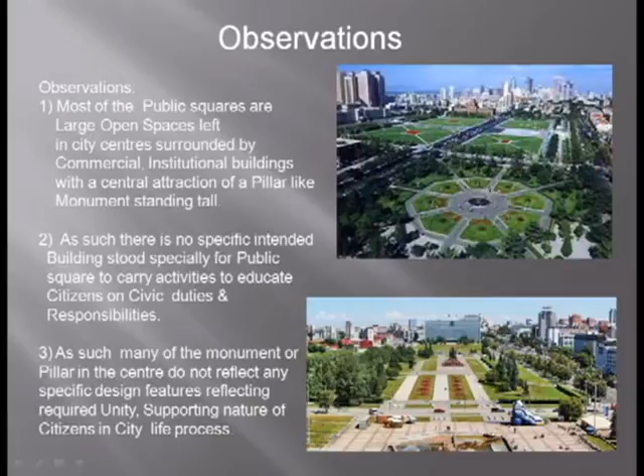Many times, these city centers become targets of people's protests on public issues which have gone out of control, and the protest march turns violent, creating chaos at these centers. The reason is that public square activities have never been targeted to educate citizens on duties and responsibilities through a dedicated space historically. Citizens fight for their rights, but do they know their duties and responsibilities, which is the basis of the life process of a civic society?

If the public closes their eyes while public issues grow, and when it comes to monster size, the public tends to flock to city centers and public squares for protesting, which may turn into violence in many cases, creating chaos at the public square. If citizens are irresponsible with their behavior in their own lifestyles as well as towards society, it can create lots of public safety problems.

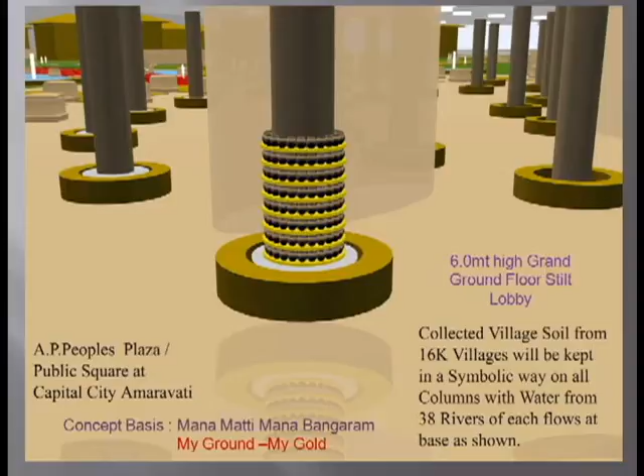Concept basis: Mana Matti, Mana Bangaram - My ground, my gold. Soil collected from the 16,000 villages will be kept in a symbolic way in the grand ground floor stilt lobby, 6 meters high, around each column, and at the base of the column water will be flowing, as shown.

Zoning plan for the 42-acre site. The site is divided into 17 zones to meet all the requirements to have a public plaza, public square, meeting all the requirements of all sections of the people.

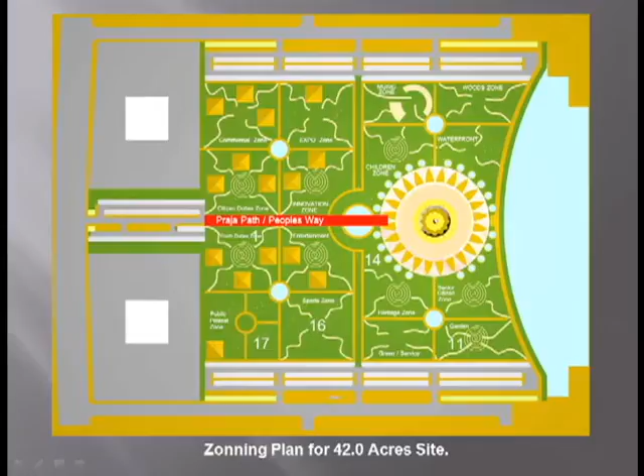Proposed zoning area statement: As said, the site is divided into 17 zones, like this: Youth Zone, Citizens Duties Zone, Science and Innovation Zone, Commercial Zone, Exhibition Zone, Children's Zone, Entertainment Zone, Waterfront Entertainment Zone, Waterfront and Sports Boating, Senior Citizens, Park Garden, Green and Services Zone, Heritage Zone, Monument Zone, Enlightenment Zone, Sports Competition Zone, Citizens Demonstration Public Protest Zone, including police post.

Proposed land use area statement: Proposed building footprint is around 3%. Open space for all outdoor activities including green areas is 60%. Monument zone is 3%. Internal driveways and parking take 21%. 3-meter wide pathways and footpaths account for 13%.

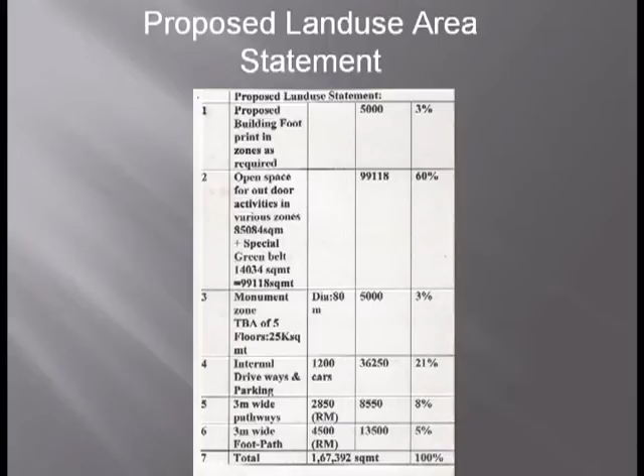Proposed concept design features description. Point 1: Access inside the site is provided from 3 roads with 3 styles of arcade columns, indicating different types of people coming and joining at Praja Path, the Ceremonial Boulevard, which leads people with a red carpet welcome to form a spiral force around the monument, and will further form support columns to the monument at ground level like stilt columns.

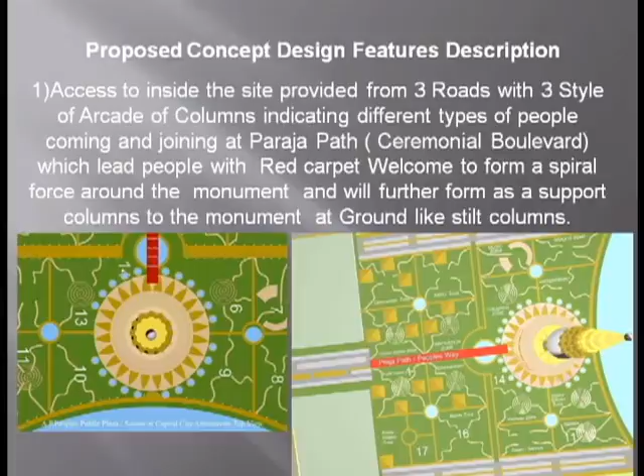Point 2: 1,200 car parking bays are proposed from 3 roads, and the rest of the site is pedestrian friendly, with only service vehicles allowed.

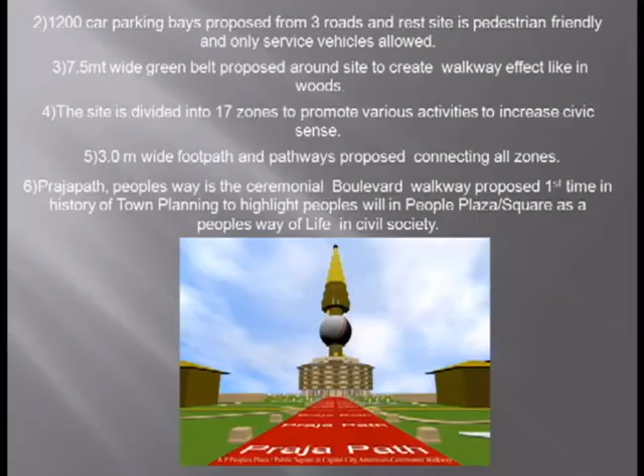Point 3: A 7.5 meter wide green belt is proposed around the site to create a walkway effect like in woods. Point 4: The site is divided into 17 zones to promote various activities to increase civic sense. Point 5: 3-meter wide footpaths and pathways are proposed connecting all zones. Point 6: Praja Path, People's Way, is the Ceremonial Boulevard walkway proposed for the first time in the history of town planning and architecture, to highlight people's will in the People's Plaza Square as a people's way of life in civil society.

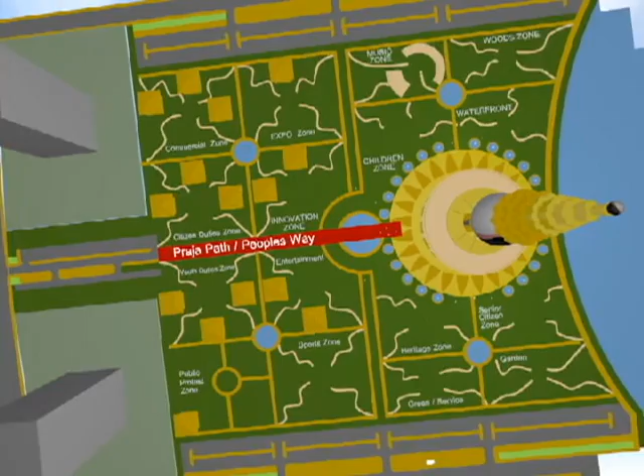The monument tower reflects unity and support of the people, like a human pyramid. Capsule lift tower 120 meters, mud color metal sheet tower 30 meters, and above that a gold color glass tower 50 meters in height, with a small globe of 6 meter diameter on top.

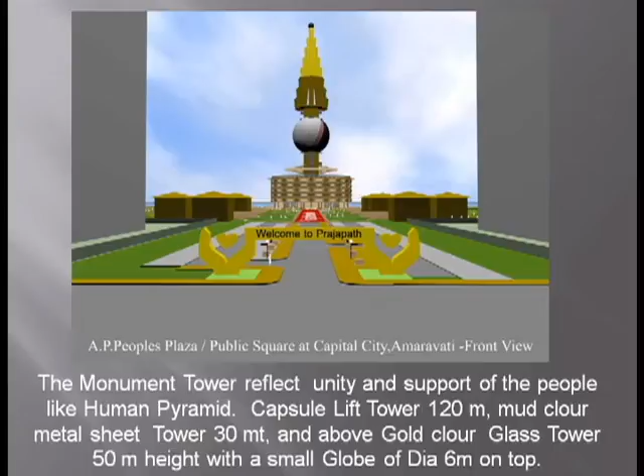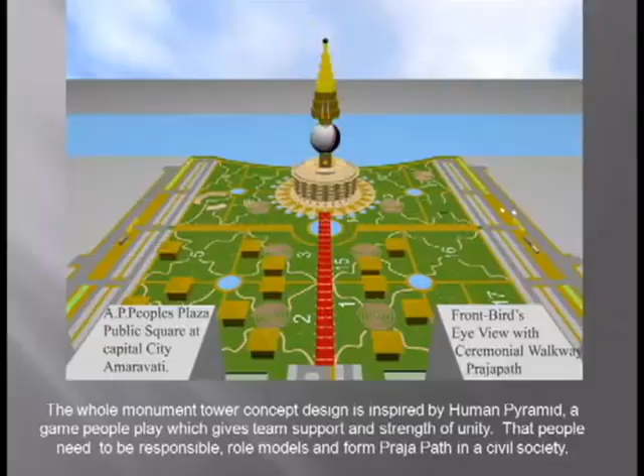The whole monument tower concept design is inspired by the human pyramid, a game people play which gives team support and strength of unity, to show people need to be responsible role models and form Praja Path in civil society - a good way of life.

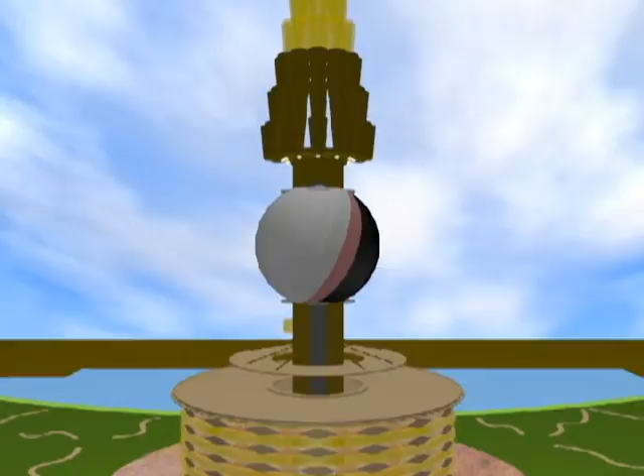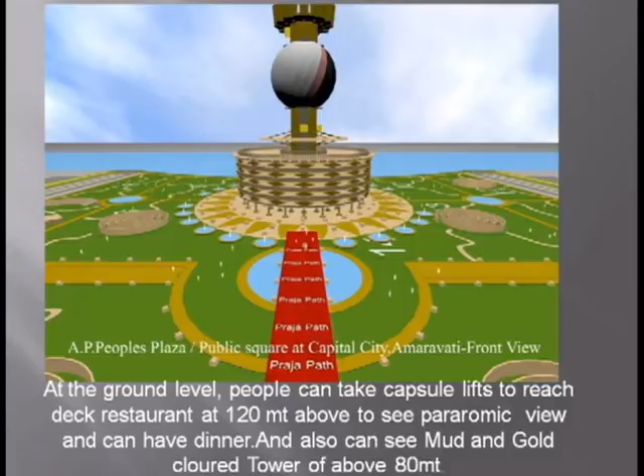At the ground level, people can take capsule lifts to reach the deck restaurant at 120 meters above, to see a panoramic view and have dinner, and also see the mud and gold colored tower above 80 meters.

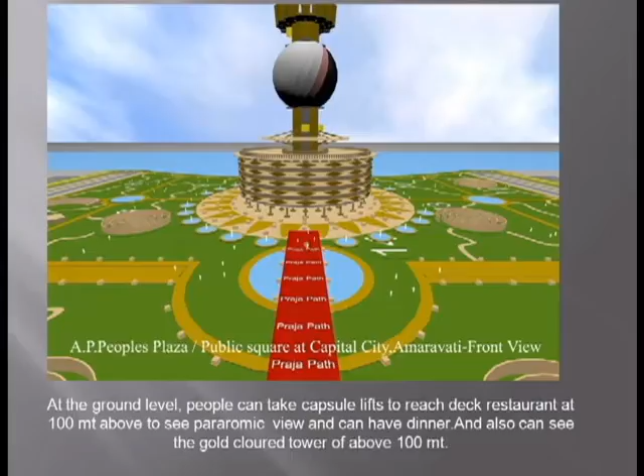A staircase of 6 meters by 3.5 meters with a concrete wall will provide structural strength to the 200 meter height tower structure all the way to the top.

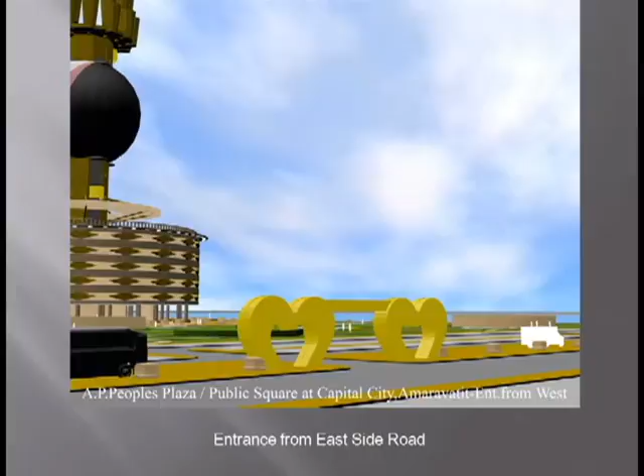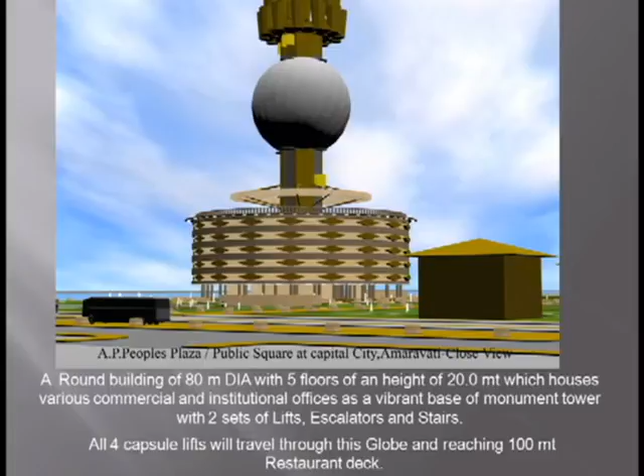A round building of 80 meter diameter with 5 floors of 20 meter height houses various commercial and institutional offices, forming a vibrant base of the monument tower, with 2 sets of lifts, escalators and stairs proposed. All 4 capsule lifts will travel through the globe, reaching 100 meters above to reach the restaurant deck.

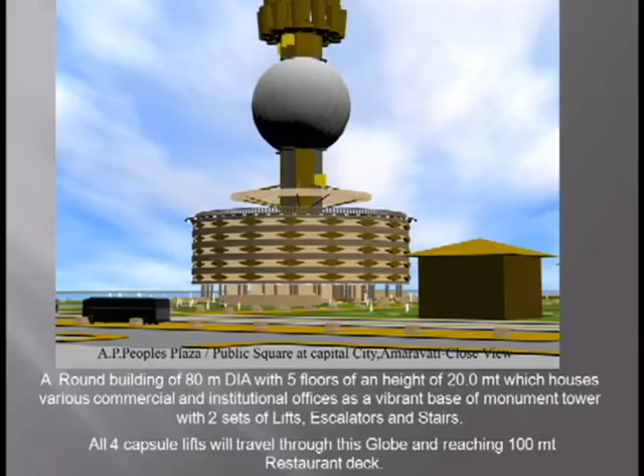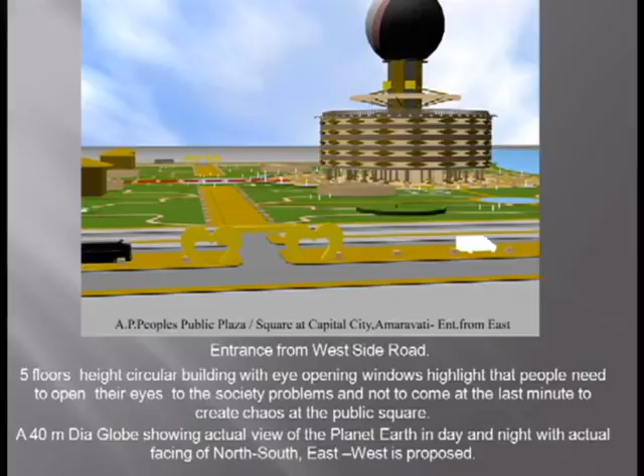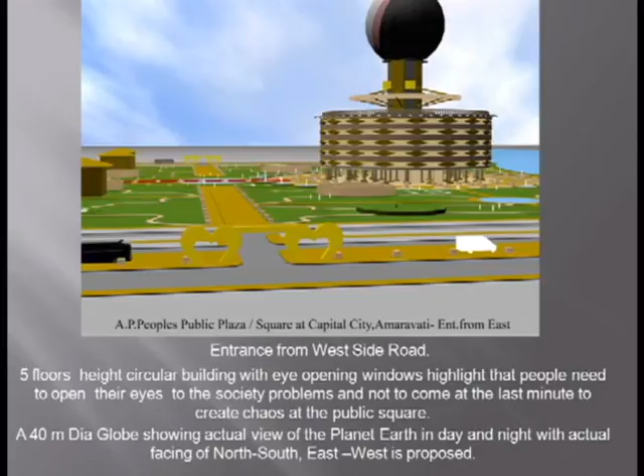The 5 floor height circular building with eye-opening windows highlights that people need to open their eyes to society's problems and not come at the last minute to create chaos at the public square. A 40 meter diameter globe showing an actual view of planet Earth in day and night, with actual facing of north, south, east, west, is proposed.

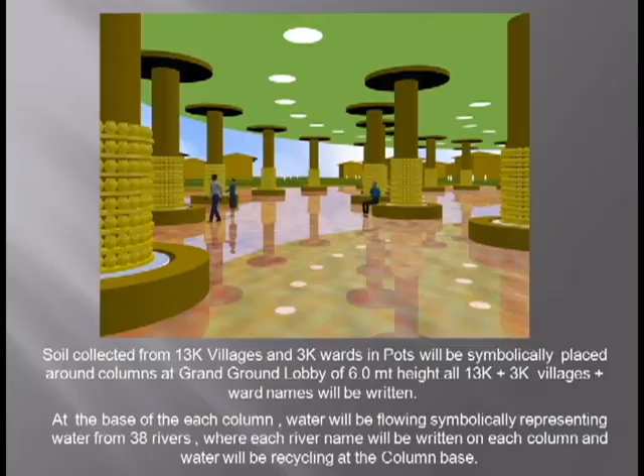Soil collected from 13,000 villages and 3,000 urban wards, in pots, will be symbolically placed around columns at the grand ground lobby of 6 meter height, with all 13,000 villages and 3,000 wards' names written. At the base of each column, water will be flowing symbolically, representing water from 38 rivers, where each river name will be written on each column base, and water will be recycling at the column base.